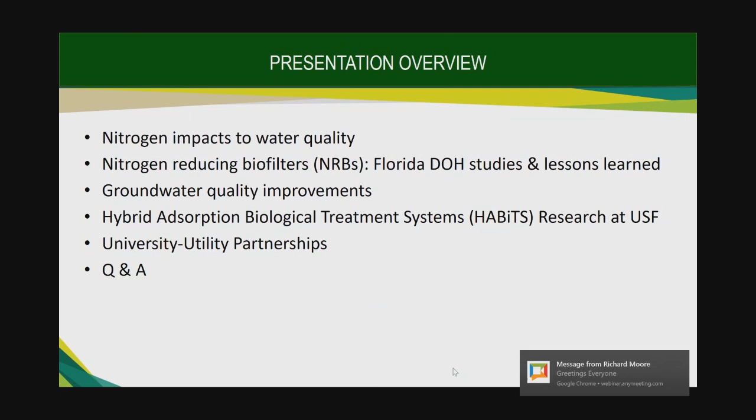Next, I'd like to briefly go over some nitrogen impacts to water quality. I want to keep this brief because I know most of you are probably familiar with this area. There are two major areas of concern for nitrogen loading. One is public health, where we have a Safe Drinking Water Act standard for nitrate, and harmful algal bloom concerns in areas that use surface waters for drinking water. The second major area is ecosystem health, and that area is probably receiving the most attention right now.

That's because nitrogen is a limiting nutrient in many water bodies, which can result in algal blooms, loss of habitat, hypoxia, and fish kills. These kinds of things have been documented in many places in the country, but most notably Cape Cod, Long Island Sound, Chesapeake Bay, and Puget Sound.

Here in Florida, we have problems in Tampa Bay, Sarasota Bay, on the East Coast the Indian River Lagoon, the Florida Keys, and specifically our freshwater springs and many other places impacted by excess nitrogen loading.

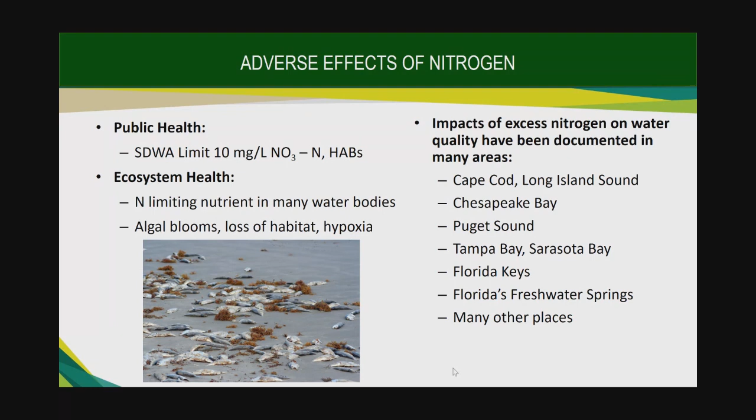There are many sources of nitrogen to water bodies, but today we're going to talk about impacts from conventional on-site wastewater treatment systems. These systems are low cost for suburban and rural areas. They're very popular, have low chemical and energy use, and provide really good treatment performance if standards are met for installation and operation, for things like BOD, total suspended solids, fecal indicator bacteria. They also provide groundwater recharge, a positive impact in some places, and some on-site reuse in certain applications.

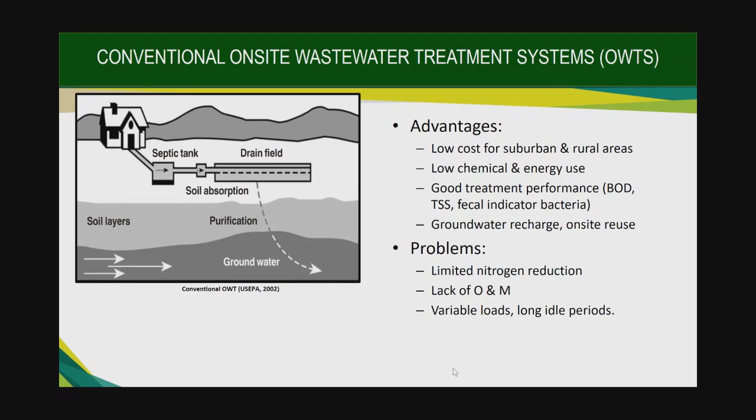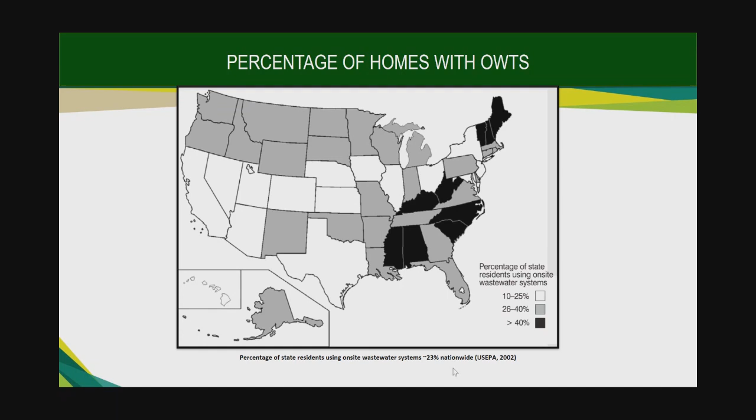The next slide shows these are not an isolated thing. Nationwide, about 23%, almost a quarter of our homes, utilize on-site systems for wastewater disposal. Some states have greater than 26% of their homes served by on-site systems, and about 10 states are greater than 40% of the home inventory served by on-site wastewater treatment. So they're not unusual—they're quite numerous across the country.

Of course, the nitrogen impacts from on-site systems are very site-specific, because they use the soil and groundwater as their receiving body. So some watersheds have relatively low on-site nitrogen loads. Here's the Chesapeake Bay nitrogen loading model, where they estimate only 5% of the load to Chesapeake Bay is from septic or on-site systems.

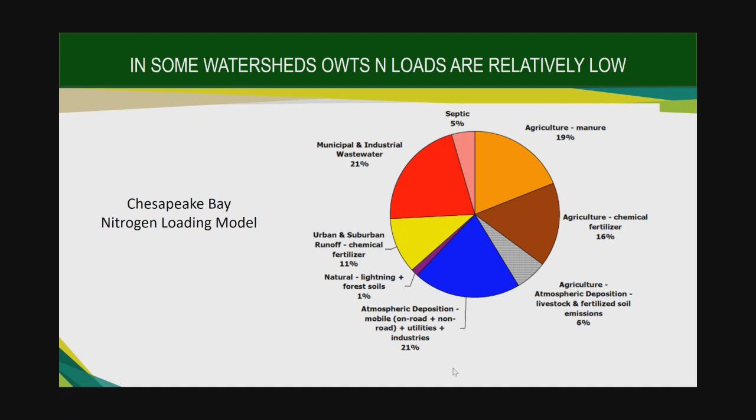The next slide shows a similar chart for the Wekiva Springs study area in Florida, near Orlando, where on-site wastewater treatment nitrogen loads are estimated to be relatively high—about 26% of the load attributed to on-site systems, labeled OSTDS. Then there are specific, smaller watersheds where on-site systems can be very high as part of the nitrogen load. Here's the Kings Bay, Florida spring shed, in the Crystal River area, where on-site systems are estimated to be about 53% of the load—a high percentage of the nitrogen load to that water body.

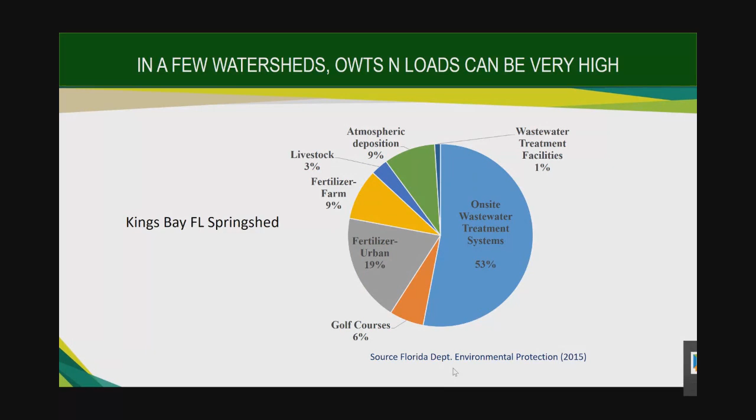Next, I want to talk about work we've been doing on nitrogen-reducing biofilters. I'll start with Florida Department of Health studies we conducted and lessons learned, which then led to work coordinated with the project USF was doing, which they'll talk about. The next slide covers the nitrogen reduction studies in Florida.

In 2008, the legislature directed the health department to conduct a study to further develop cost-effective nitrogen reduction strategies for on-site wastewater treatment systems. This was due to the crises I showed you—the springs impacts and the estuary impacts.

The legislature wanted systems that were similar to conventional on-site systems in terms of their operation and maintenance, and thus relatively passive in operation. This resulted in the Florida On-Site Sewage Nitrogen Reduction Strategies Project, which began in 2009.

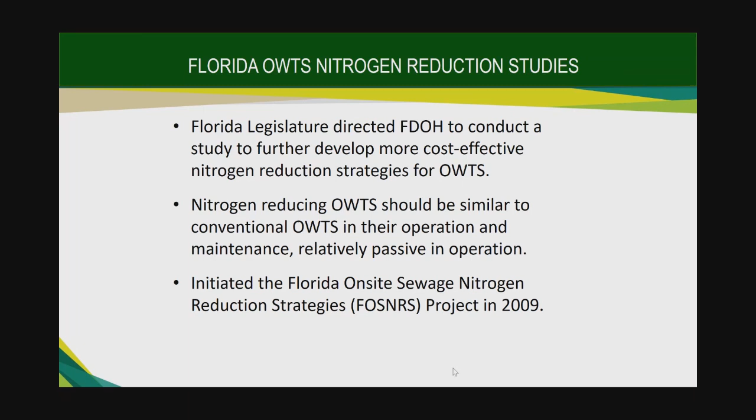The next slide shows 4 major areas that were included in this study. I was the project manager for this study with DOH. Today we're going to talk mostly about task A and B, which were the treatment performance aspects, the treatment technology aspects of the study.

We also did a lot of groundwater work. There's a lot of results from this study, many, many pages of documents, and you can see more results on that FDOH website at the bottom of the slide, where all the deliverables are listed. But today I'm going to talk mostly about the treatment performance aspects and the systems we developed, and even then, just a few options that we came up with.

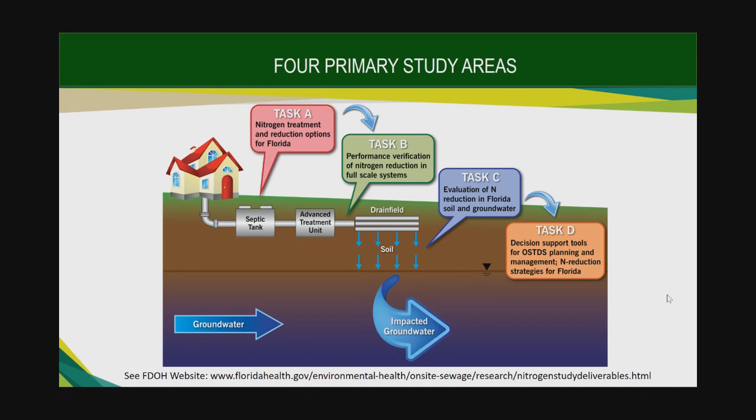So next slide defines what we mean by passive nitrogen reduction system, which was a term given to this study and to these systems. Again, kind of a repeat, but they're really defined as nitrogen removing on-site systems that are as similar as possible to conventional on-site systems in terms of their operation and maintenance.

In Florida, we developed a specific definition that could be applied to code language. That specific definition is on-site nitrogen reduction systems that reduce effluent nitrogen using reactive media for denitrification and a single liquid pump if necessary. This pump provision was put in there because Florida is very flat in most places, and our topography wouldn't allow for much additional treatment process to be added to the system if you couldn't raise the liquid up. So we added this single liquid pump if necessary.

So in terms of passive media, we looked at nitrification media such as sand, expanded clay. We looked at clinoptilolite as well. But these are medias that could be layered in an unsaturated way and effluent percolate through them for nitrification.

For denitrification, we looked at 2 types of media: lignocellulosic-based material, wood-based materials such as wood chips, sawdust, and so on, which provides an organic supplement for denitrification. We also looked at an inorganic supplement in the terms of elemental sulfur for denitrification media, which uses more of an autotrophic process for denitrification. We looked at both of those.

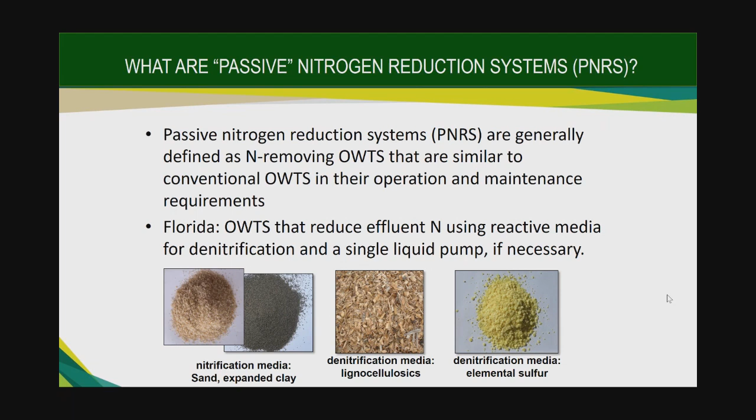Next slide shows what we mean by nitrogen reducing biofilters. The simplest concept we came up with are these in-ground layered on-site systems that reduce effluent nitrogen using reactive media for denitrification in a relatively passive process.

So the arrow on the left shows this 2-stage biofiltration process. You simply build a septic system drain field type process where the upper layer is sand or some nitrifying media where we nitrify compounds to NO3. Then the second stage, which underlays that media, is a second layer of media used to denitrify the nitrate to nitrogen gas. Again, the denitrification media we looked at were lignocellulosics and elemental sulfur.

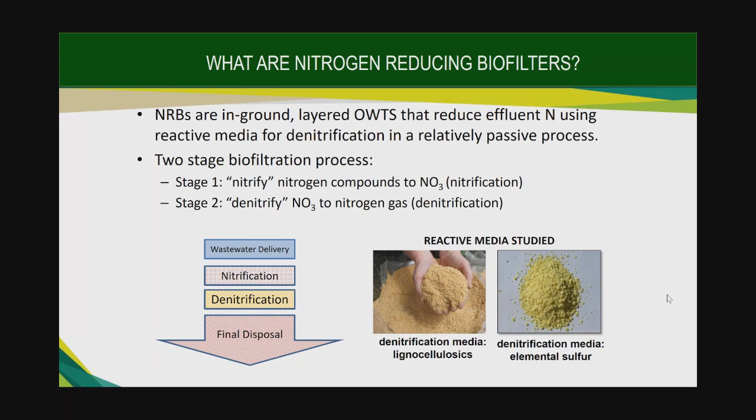The next slide shows a successful prototype we developed. We did a lot of bench scale and lab scale work initially, but then we actually built a one-third scale in-ground nitrogen-reducing biofilter at a site here near Tampa. The site had high groundwater, so it required a mounded system.

Essentially, we built a mounded system that took effluent from a septic tank, applied it via drip irrigation to a sand mound that included about 18 inches of sand, underlain by an HDPE liner. You can see the V-shaped liner, which was filled with a mixture of sand and sawdust. So effluent would percolate through the upper layer of sand, be nitrified, and then saturate in that liner, so denitrification could occur using the lignocellulosic material as an organic carbon supplement.

The effluent from that liner, then we did this in a modular fashion so we could look at both methods. The effluent from that liner then went through an upflow sulfur tank, simply elemental sulfur with a perforated pipe at the bottom, so effluent from the liner flowed up through the sulfur, and then we just disposed of it out through infiltration chambers in the ground.

So this was very successful in terms of its performance. We achieved 90% total nitrogen reduction off that liner, in other words, through the lignocellulosic sand media, and then a total nitrogen reduction of 95% through the ultimate system after the sulfur tank.

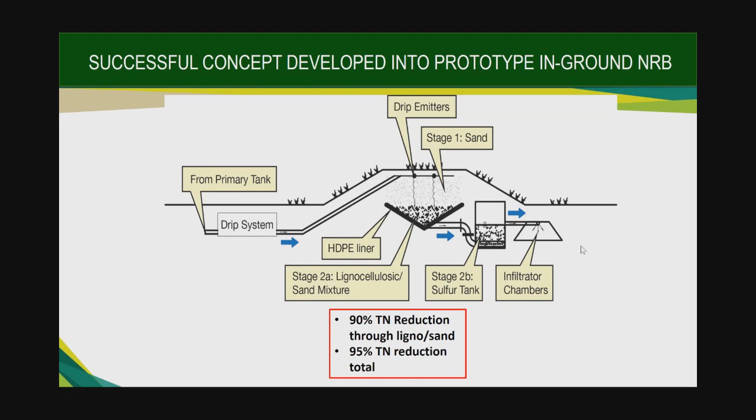Very, very good performance, and that led us to the next slide where we actually implemented this at full scale at a single-family home in Florida.

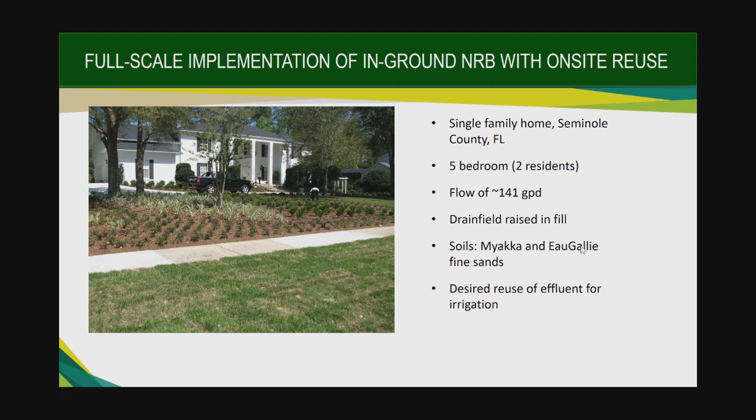Again, a very similar concept. We built this in-ground nitrogen-reducing biofilter. At this site, we actually used the effluent for on-site reuse to irrigate the very nice landscape this homeowner had at his house. It gives you some of the characteristics. It was, again, a mounded system because of groundwater elevation concerns, which we have a lot of in Florida.

Next slide shows the schematic of the system, or at least a cutaway of it. This was very similar to the prototype I just showed you. It was a lined system, which included a sand layer underlain by a wood-sand mixture, with effluent applied by drip irrigation - that's the purple pipe. The effluent then flows out of that liner into a sulfur tank, which also served as a storage tank for irrigation. It upflowed through sulfur in that tank, and then we took off of that and used it for drip irrigation in the landscape area around the house and along that fence. So again, nitrogen removal and on-site reuse for the effluent.

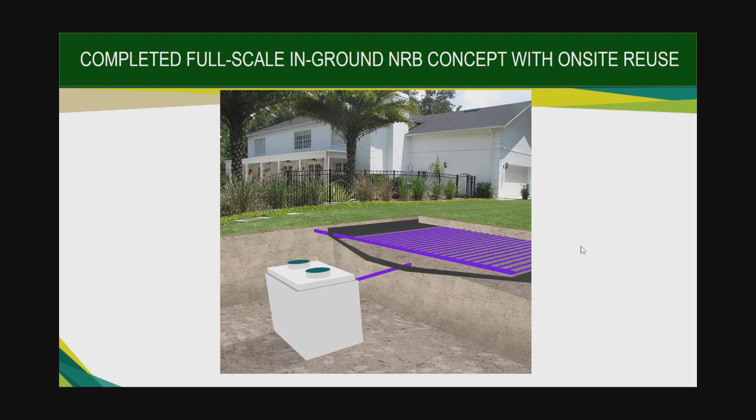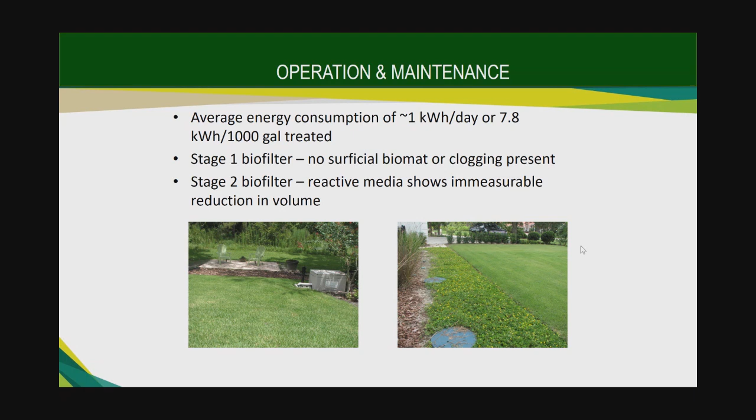The next slide - of course, with these kinds of improvements in effluent quality, you'd expect groundwater quality improvements, and we've experienced some very interesting groundwater quality improvements. The next slide shows 2 plan views of the site: on the left, the nitrogen plume down gradient from the existing drain field before the nitrogen-reducing biofilter was installed, and on the right, the new system after the nitrogen-reducing biofilters were installed.

You can see the middle scale there - the colors represent total nitrogen concentration in groundwater from 0 up to greater than 40 milligrams per liter. On the left, you can see we had quite a nitrogen plume down gradient of this existing drain field. The darkest orange was somewhere around 40 milligrams per liter or above. After the NRB installation, you can see we were at background levels everywhere down gradient of the new system, and that occurred relatively quickly, within 2 or 3 months.

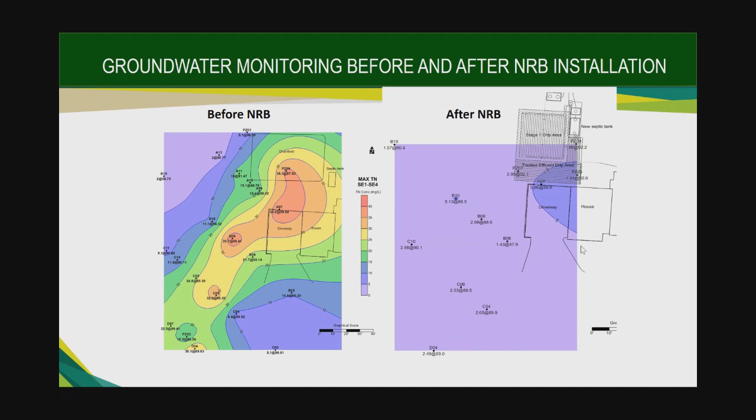This picture here is really a snapshot in time, but if you look at the next slide, we'll see that although that was a snapshot, the results were consistent after the installation. This is a time series plot of total nitrogen in groundwater at one of the most impacted wells - one of the wells in that dark orange area. You can see, prior to the installation, left of the dashed line, relatively high concentrations fluctuating due to precipitation and other factors, but relatively high concentrations overall. Then on the right, consistently low concentrations after the NRB was installed.

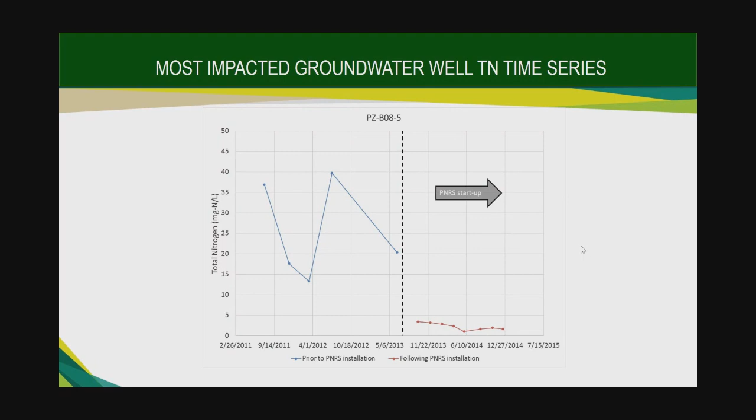The next slide shows that for early implementation in the state, we've focused on development of a very simple layered system that is now in the code in the state of Florida, where additional modifications and process configurations are being talked about for the code. But right now, we've just focused on this very simple system, the layered drain field.

We call this the in-ground nitrogen-reducing biofilter. You have septic tank effluent distribution above a sand layer where you get nitrification, underlain by a denitrification layer, which we're recommending a roughly 50-50 mixture of sand and either sawdust or wood chips or some lignocellulosic material, and then underlain by a liner or lower permeability layer that allows moisture content increases in that lower layer for denitrification. These are being implemented in the state of Florida and elsewhere.

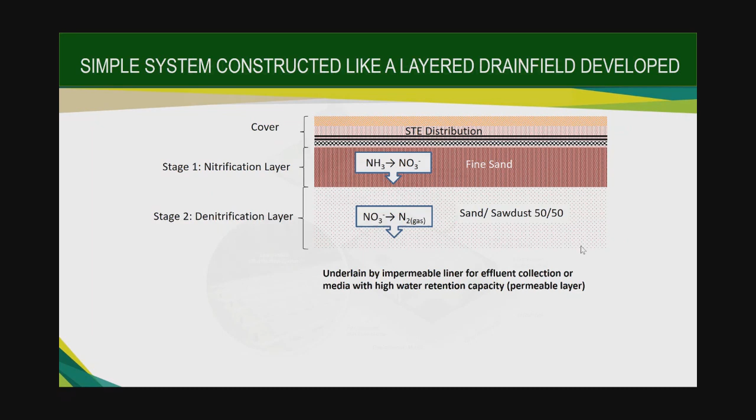The next slide shows a nicer schematic of the system. This was actually a schematic of what we're doing up in Long Island right now, working with Stony Brook University. Household discharge goes into a septic tank, effluent goes to a pump tank, goes to this nitrogen-reducing biofilter. The picture on the left shows a low-profile distribution system we're using in some of the systems in Long Island to raise the system up in the soil profile.

And then it's underlain by an unsaturated media such as sand for nitrification, and a lignocellulosic sand mixture for denitrification below that. These are achieving good results in Cape Cod, in Long Island, and in Florida as well. So that's being implemented, it's in the Florida code and being implemented in other places as well.

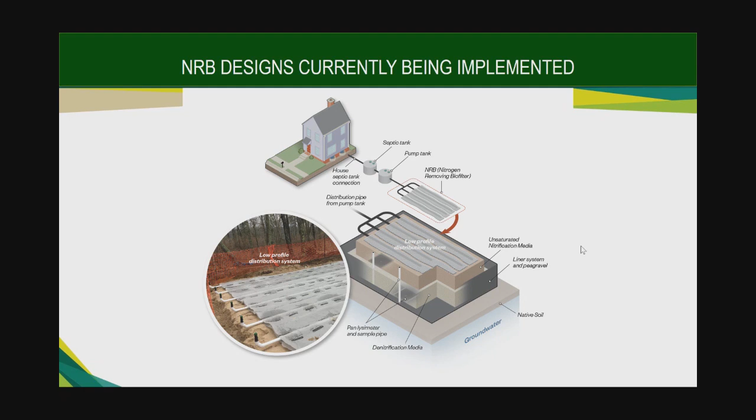With that, I'm going to turn it over to Serena, who's going to talk about what USF did in moving forward with some of this work, and some really interesting research that was done at the university.

Thank you, Damon. So we were very honored to receive the AAEES E3S award in the university research category for this project.

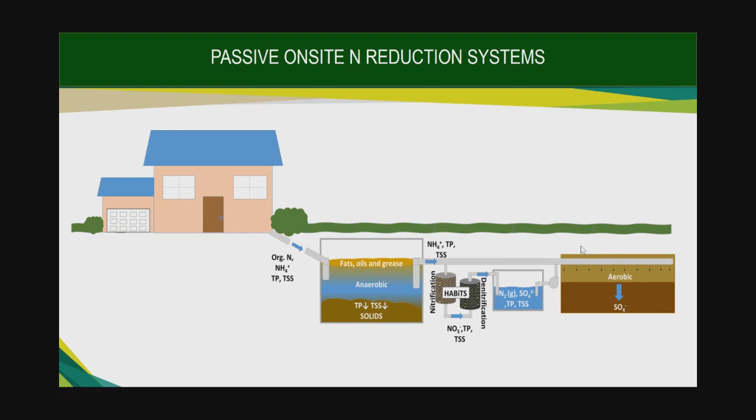I'll tell you a little bit about our process, hybrid adsorption biological treatment systems. One of my students, Laura Rodriguez Gonzalez, came up with this acronym, HABITS, for this process. This is really just reviewing what Damon just talked about, showing the home, wastewater going into the septic system, into the septic tanks, and then followed by an unsaturated nitrification reactor, and then a saturated denitrification reactor containing a reactive media, and then finally to the drain field.

Just a little review of biological treatment processes here. We have our influent wastewater that's high in organic carbon, measured as COD, organic nitrogen, and ammonia. That goes into the septic tank where you get some ammonification occurring coming out of the septic tank.

That ammonia goes into the aerobic biofilter where nitrification occurs, so ammonia is being converted to nitrate by nitrifying bacteria. If we have a recirculation line, we can take the effluent, or a portion of it, and recirculate it back to the septic tank or a pre-denitrification tank, where we can get some denitrification occurring.

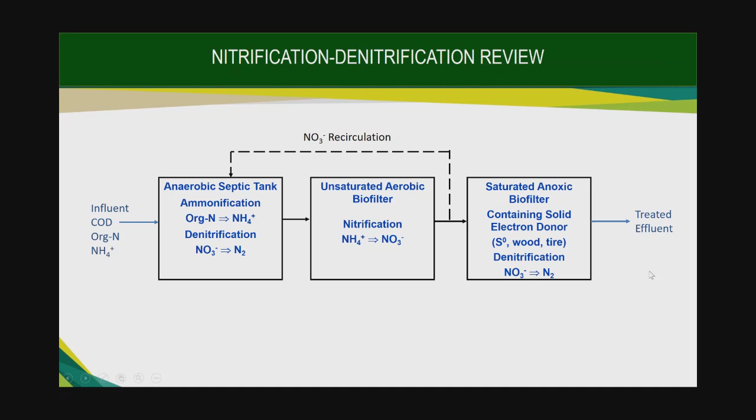After nitrification, we go to the saturated anoxic biofilter containing that solid substrate, which becomes a slow release source of electron donor for denitrification, or the conversion of nitrate to nitrogen gas. As Damon mentioned, they worked with sulfur and wood chips. We also looked at the combination of sulfur and tire chips, and we saw in Damon's study the very high quality of the treated effluent.

So I'm going to talk a little bit about sulfur oxidizing denitrification. I saw in the chat there were a couple of questions coming in about that also. These microorganisms are chemolithotrophic bacteria, meaning they use an inorganic compound, in this case elemental sulfur, as their energy source. They're autotrophs, using carbon dioxide as their carbon source, and they use nitrate as their electron acceptor.

Some advantages of sulfur oxidizing denitrification are that these organisms grow very slowly and have low biomass yields, so we get less clogging in the reactor, meaning less backwashing needed and less operations and maintenance costs. The sulfur pellets themselves are a byproduct of petroleum refining, so it's a very inexpensive substrate to use for denitrification.

Another disadvantage of this process, though, is that you do get some sulfuric acid production, so some acidity. We found in our research that crushed oyster shells, which are another waste byproduct, were a very effective buffer.

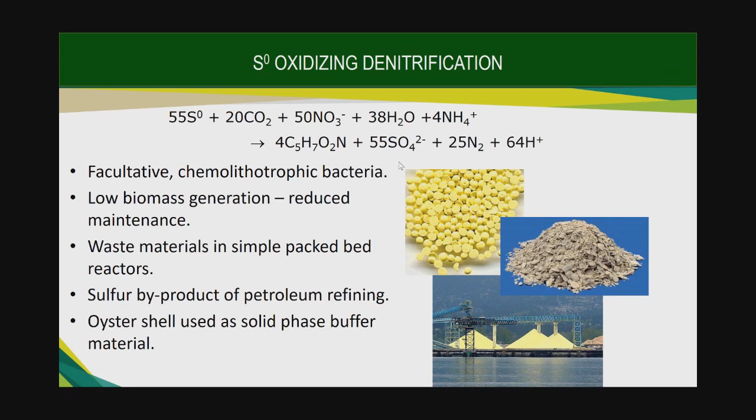The US EPA drinking water guideline for sulfate is 250 milligrams per liter. So we want to make sure that when we're treating wastewater using sulfur oxidizing denitrification, we don't create a secondary pollution problem.

We know that microorganisms don't like these high variations in flows and loads. During the morning and evening peaks, the nitrogen load can be too high for the microbial process. During the nighttime, the organisms might be starving. This is exacerbated when you have people in the household who are on vacation, maybe a summer house where people are away 6-9 months of the year, and then they come back and the microbes have all died, and now you have to reestablish the microbial community.

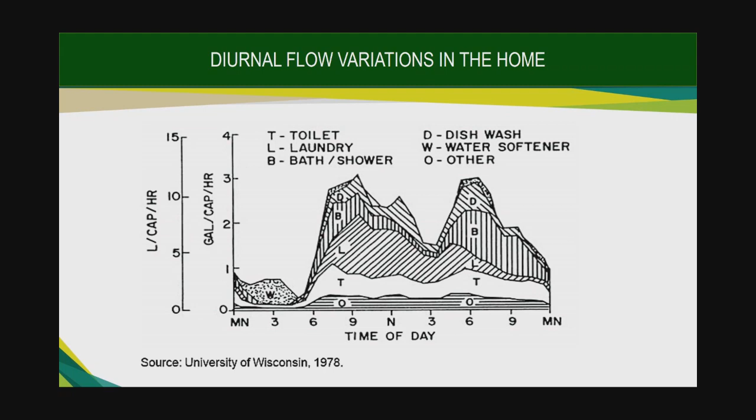Zeolite is a natural mineral. It's mined in large mines out in the western states, I think in Utah and New Mexico. The material that we used in this process was called clinoptilolite. Clinoptilolite has, in the lattice framework of the mineral, sodium ions attached to it.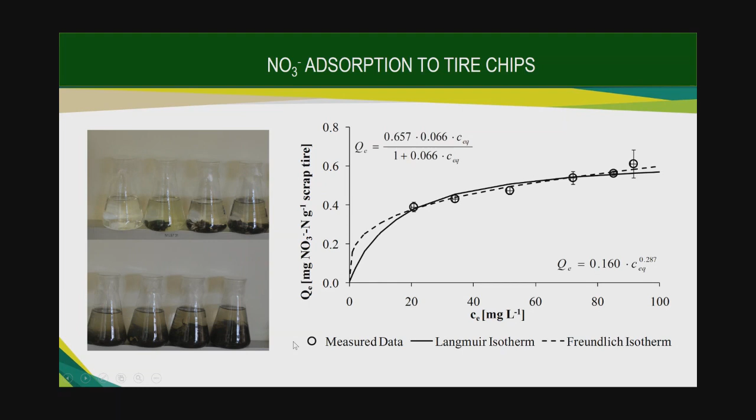This is some other work that we did with scrap tire chips. Interesting enough, we found that the scrap tire chips were a very good adsorbent for nitrate. So this is a similar graph as the one we saw with zeolite and ammonium, but now we're looking at nitrate concentration and adsorbed nitrate to the scrap tire chips. You can see how we set up an experiment here with our little beakers containing our wastewater and our scrap tire chips in different masses of tire chips.

So these are the materials that we added to our reactors. We had 2 stages, very similar to what Damon presented. The first stage was an unsaturated biofilter for nitrification.

It included expanded clay as the biofilm carrier, the clinoptilolite, shown here, as the ion exchange material, and the oyster shells. Of course, we crush them, but this is just showing you what an oyster shell looks like, for alkalinity.

The second stage was a saturated biofilter for denitrification. It contained those elemental sulfur pellets. They look almost like lentils when you see them on the shelf. It had the tire chips for the ion exchange material, and also included those oyster shells.

Another interesting thing about the tire chips was that we found that a little bit of the organic carbon from the tires leached out slowly over time. So in addition to sulfur oxidizing denitrification, we actually saw some of the denitrification was due to the organic carbon being leached from the tire chips. And that actually helped us to keep the sulfate levels low in our effluent.

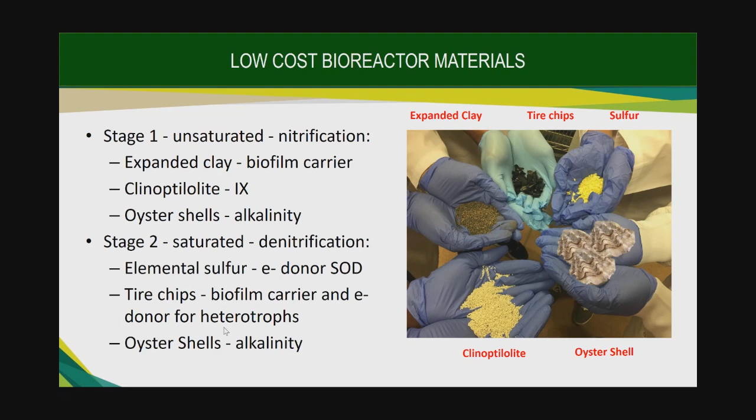Here's some bench scale studies that we did. We had 2 reactors side by side. One was the Habits reactor containing the expanded clay and clinoptilolite, and the second was a control with just expanded clay. What you can see here in the data, the orange dots are the influent concentration. The blue triangles are the effluent from the control, and the purple diamonds are the effluent from our Habits reactor.

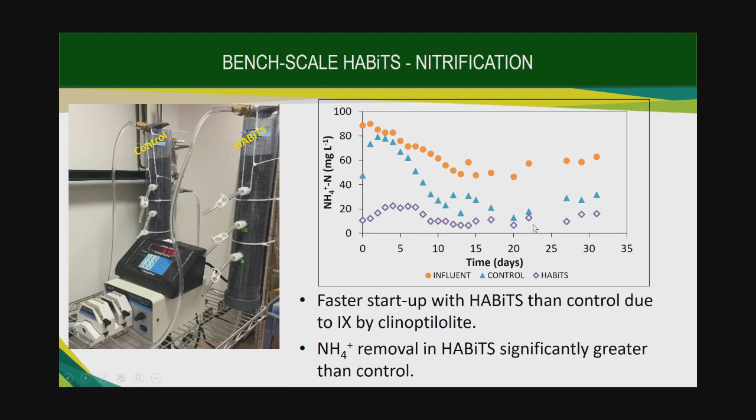What you can see is that right on day 1, as soon as we started feeding the reactor septic tank effluent, we saw very, very low effluent ammonia concentrations due to that ion exchange process. We can also see that after about 15 days, our ion exchange capacity based on our calculations should have been exhausted. But what we see is that after that point, of course, the microorganisms are taking over and nitrifying our wastewater. In the control, on the other hand, there was this long acclimation phase before we got down to that low level of ammonia in the effluent.

This is showing the denitrification experiment. What you can see here is a small column with the tire chips, the crushed oyster shells, and the elemental sulfur pellets. We had nitrified wastewater coming in an upflow manner, and the denitrified effluent.

This is showing the data a little differently. What we show here is the flow rate times the influent nitrate concentration, showing these diurnal variations in load. So we had a high influent variability in the nitrogen load, but despite this high variability in the influent nitrogen load, we still had very low, stable nitrate concentrations in the effluent. So we were very happy with this proof of concept.

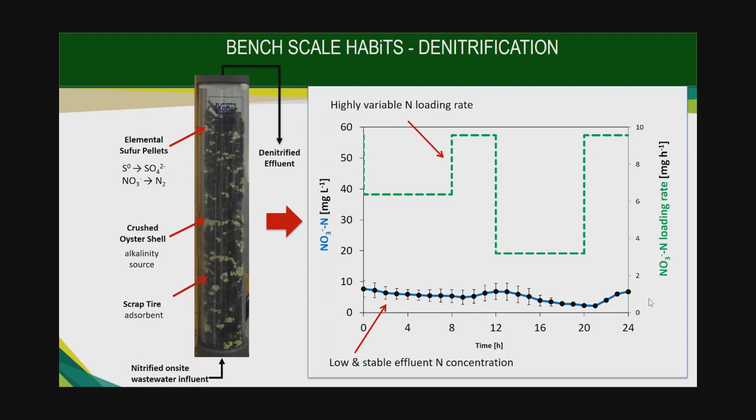So then, working with our partners in Hillsborough County Advanced Wastewater Treatment Plant, we built a pilot. We had a septic tank, an aerobic biofilter, and an anoxic biofilter. We actually ran 2 systems side by side, one which we called R, which had recirculation and pre-denitrification, and the other one we called FF for forward flow, had no recirculation.

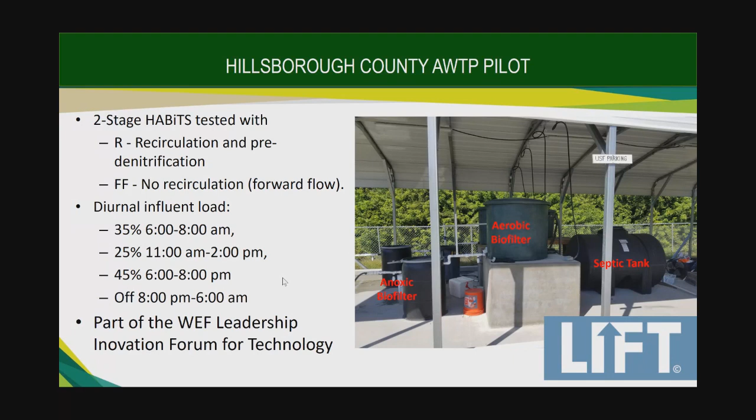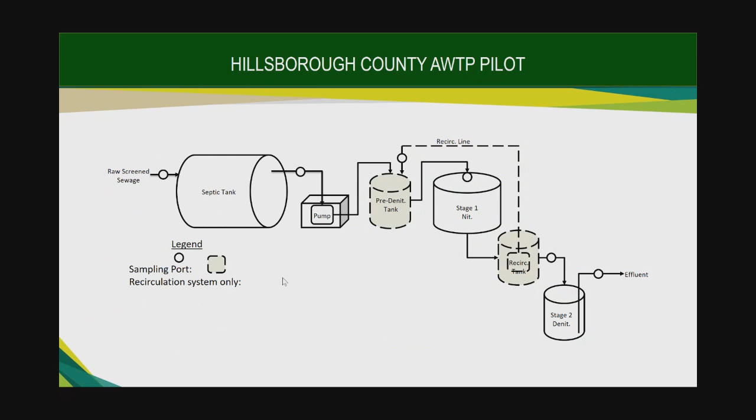Again, similar to our previous experiments, we used this diurnal influent load where we had high loads in the morning and evening, a low load in the afternoon, and the system shut down at night. This is just a schematic of the system showing the septic tank, the pump, stage 1, stage 2, and then in gray with the dashed lines, the components that were in place for the system with recirculation. Here's some results from our pilot system.

This is just a snapshot showing the nitrogen speciation. You can see the influent, which is mainly ammonia and some organic nitrogen. After stage 1, much of that ammonia is being converted to nitrate. And then after stage 2, almost all the nitrate is gone.

In fact, throughout our experiments, we had extremely good performance of stage 2. The system with the tire chips and the sulfur pellets consistently had nitrate and nitrite concentrations below our method detection limits. And this is just showing the performance with a 1-to-1 recirculation rate or a 3-to-1 recirculation rate.

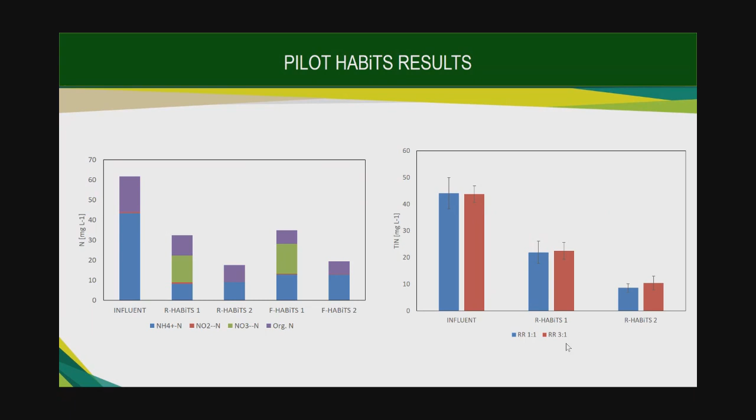If you want more information about this, we published a paper recently in the Journal of Sustainable Water in the Built Environment. I wanted to give a shout out because it was part of a special collection on onsite and decentralized wastewater management systems, and I have the link here. I noticed there are a few other authors on this call who have published papers as part of that special collection. So now I'll pass it on to Jim.

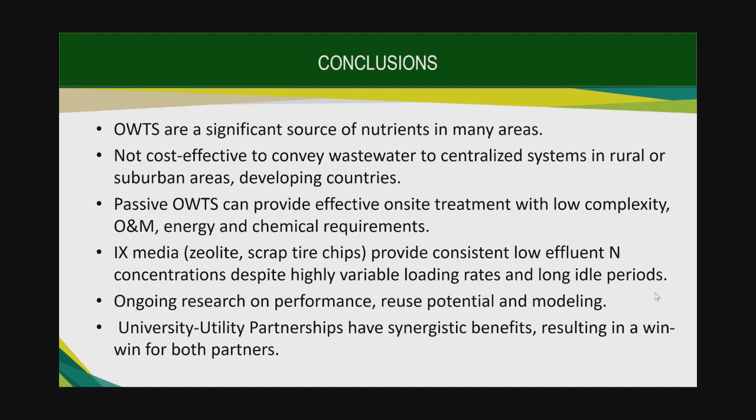We're doing ongoing research on the performance. Michelle Henderson, who's on this call, is doing work on life cycle assessment as well as looking at reuse potential. We have another student looking at modeling of the process. As Jim mentioned, university-utility partnerships have synergistic benefits, resulting in a win-win for both partners. These are some of the graduate students, postdocs, REUs and RETs, and we had local high school teachers who helped us out on this project, along with other USF faculty, Maya Trotz and Kebreab Ghebremichael. Here are some of the funding agencies and partners, and I put our email addresses on the final slides in case you want to contact us afterwards.

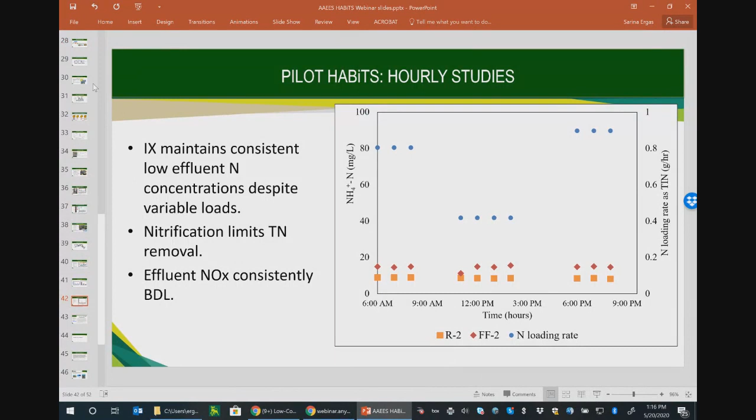There are references on several of the slides that you can go to for more detailed information. We did a detailed report for DOH on the test systems that talks about the loading rates and the stages, and BOD removal gives all the data.

So yeah, I thought you had BOD numbers here, but you don't. No, I don't have it through the sand. First stage sand, the nitrification part, the BOD is negligible, you can't measure it. But then you gain a little bit of BOD from the wood that is potentially utilized through the sulfur, and if you don't have sulfur, it goes to the drain field. But again, it's very low compared to septic tank effluent, so the drain field will handle any residual BOD that comes off. We never saw BOD numbers greater than 30 or 40 in our test systems, which any drain field could handle because they're designed to handle more than that.

We mainly measured COD and had very good COD removal. I do want to mention, though, we had a little bit of a problem with stage 2 where we had some turbidity in the effluent. I don't know if you saw this, Damon, but you get some sulfur particles carried out of the reactor, causing a bit of a cloudiness, a yellow cloudiness in the effluent.

We found that did interfere with the chlorine disinfection, so we actually got much better results in terms of fecal coliform removal when we looked at just stage 1 treatment followed by disinfection. We took stage 2 off completely and just put in the disinfection stage, and we got very good BOD removal, nitrification, some denitrification because of the recirculation, and then disinfection using the chlorine tablet feeder. So that was one of the recommendations for on-site reuse.

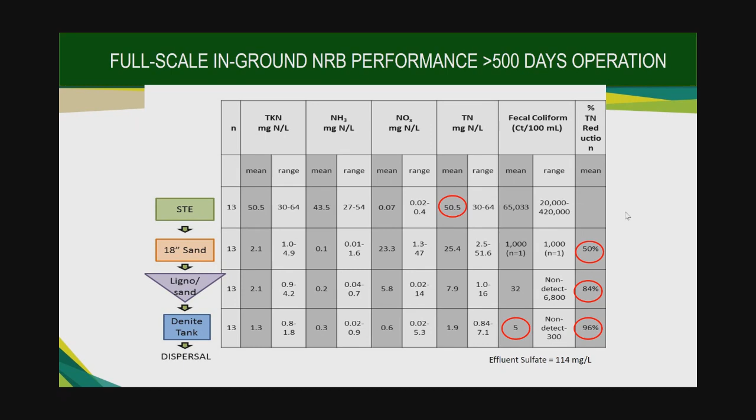I think we benefited from the pandemic, everyone. Yeah, thank you so much, everybody. Everyone really enjoyed it.